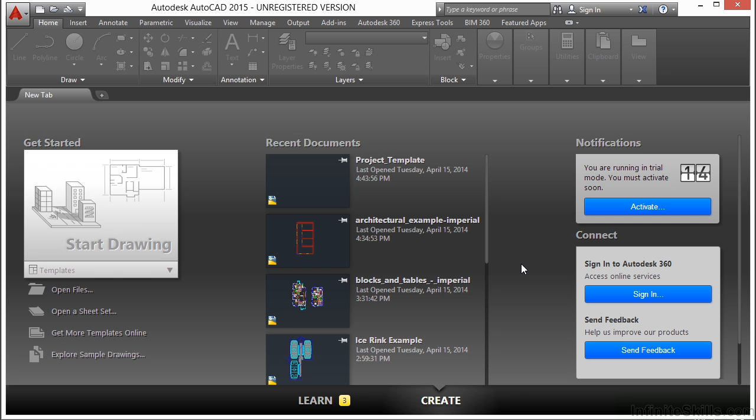What is a drawing without dimensions? Well, it's just a bunch of lines, I guess. Dimensioning a drawing properly is essential. There are many tools in AutoCAD to help us annotate our drawings. Dimensioning is the process of adding measurement annotation to a drawing. Let's open up the dimension example drawing for this chapter.

You can create dimensions for a variety of object types in many orientations. Linear dimensions can be horizontal, vertical, aligned, rotated, a baseline, or a continued or chained string of dimensions. Here we have several dimensions on this bracket.

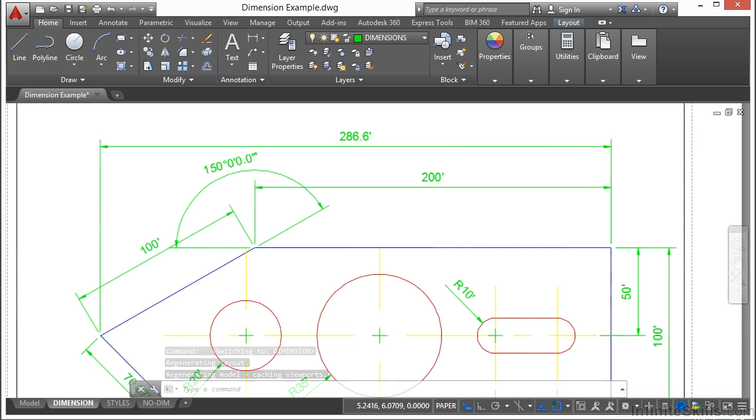Dimensions can also be associative, non-associative, or exploded. Associative dimensions adjust to changes in the geometric objects that we measure. I recommend that you always use associative dimensions, especially if you're placing your dimensions in paper space, as is the example here. Dimension associativity defines the relationship between your objects and their dimensions.

Now, there are three types of associativity between geometric objects and dimensions. Associative dimensions. These types of dimensions automatically adjust their locations, orientations and measurement values when the geometric object associated with them is modified. Now, dimensions in a layout may be associated to objects in model space. That's where the DIMASSOC system variable is set to 2. We'll go over this later on.

Non-associative dimensions. Non-associative dimensions do not change when the geometry that they're measuring changes. The dimension variable for this is DIMASSOC set to 1. That's DIMASSOC when it's set to 1.

Now, exploded dimensions. These types of dimensions contain a collection of separate objects rather than a single dimension object. The DIMASSOC system variable is set to 0. The appearance is very easy to alter, but they are no longer controlled by a dimension style or by a geometric object. They will not update automatically like associative dimensions will.

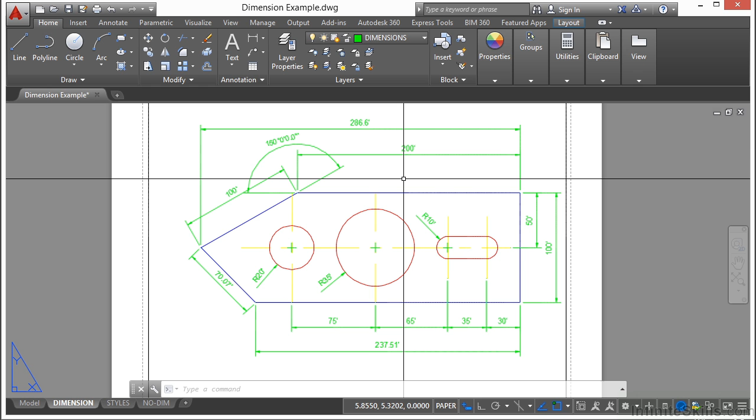Dimensions have several distinct elements. They have the text, they have dimension lines, that's the horizontal line here. They have arrowheads, which you can change to be many different shapes. They also have extension lines. Those are the vertical lines that you see here that come from the object they're dimensioning and extend up to the dimension line and arrowhead. All of these can be controlled, defined, and altered through a dim style or dimension style. And this can also be done through the Properties manager.

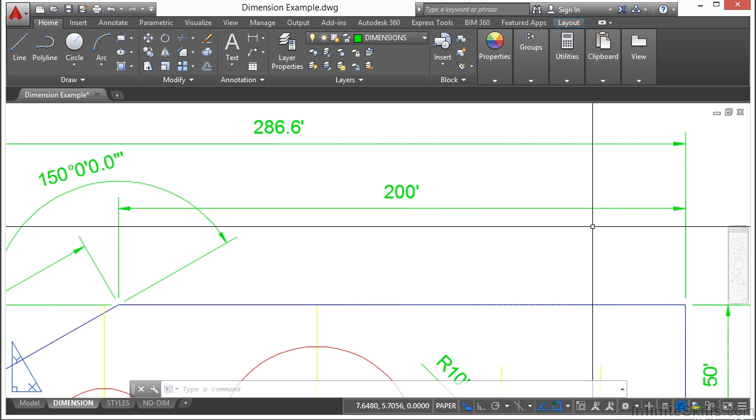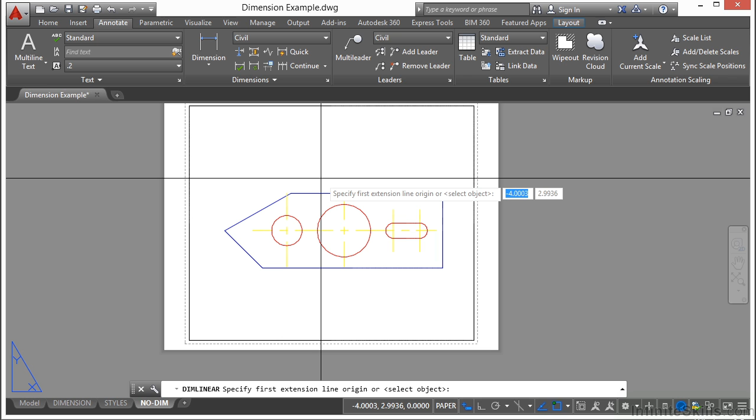Let's make some basic dimensions. Let's go to the No Dim Paperspace tab. Go to the Annotate tab on the ribbon. Go to the Dimensions panel. Click on the arrow here from Dimension and click on Linear. Make sure your Osnaps are turned on and that you have your endpoint Osnap running. When you're set up that way, you'll be able to create some dimensions very quickly.

I'll show you. I snap to here, and I have my dimension. If I select my aligned dimension, I can get dimensions at angles that give the true length value. If I go back to my linear dimension, this will create a dimension that is locked into a horizontal or a vertical orientation. Those are your basic dimensions, the linear and the aligned.

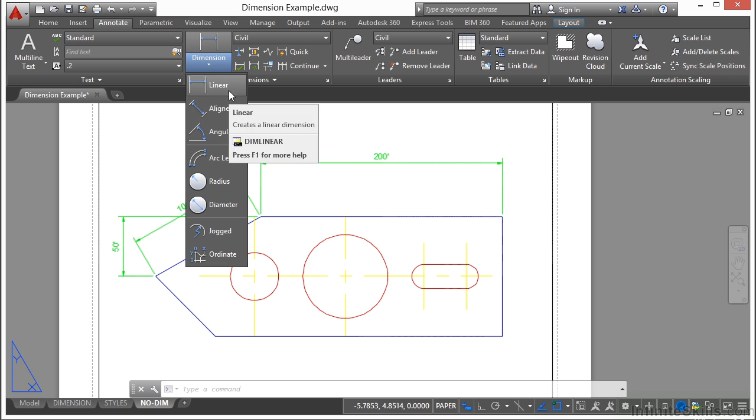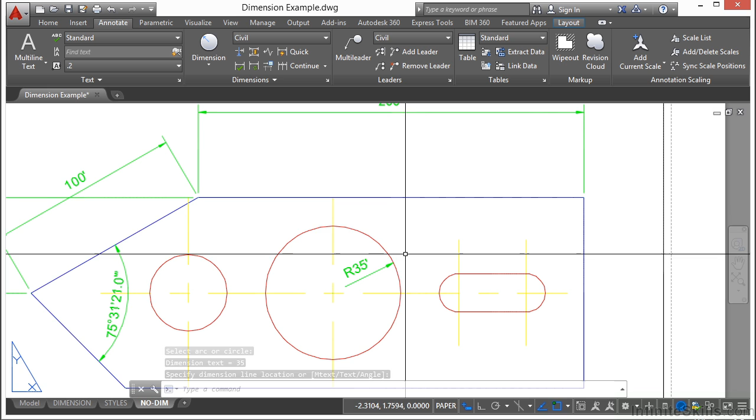Now, an angular dimension will display the angle between two lines or objects. Radial dimensions will give you the radius or diameter of a circle or arc. Just select the object of a circular nature and then pick where you want it to go. That is the very basic use and application of dimensions. We're going to get into each part of it a little bit more in detail.